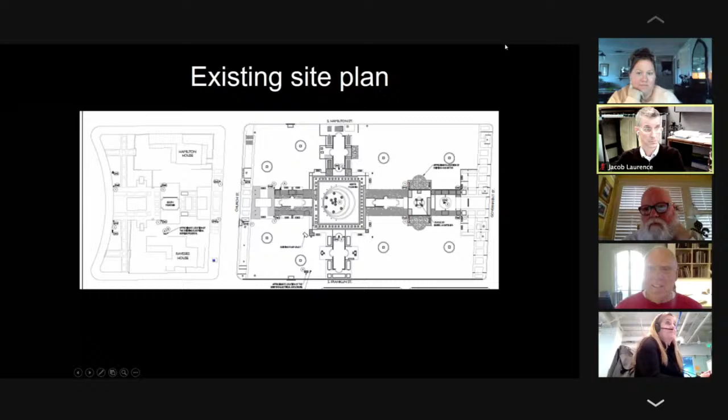So anyway, I just wanted to give my support to this after we talked thoroughly about it, and I understand it now. And it will certainly replicate the lights with the gas lanterns with the mantles in them, which do exist there. And then they want to use all the parts that are salvaged from the other actual flame gas lanterns in the historic districts wherever they can be used. So that's my 2 cents.

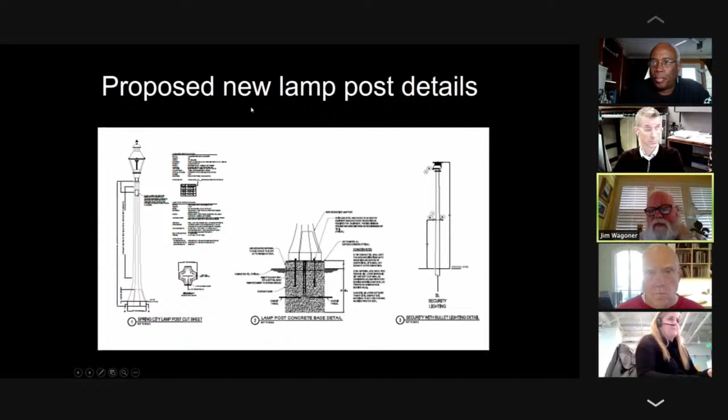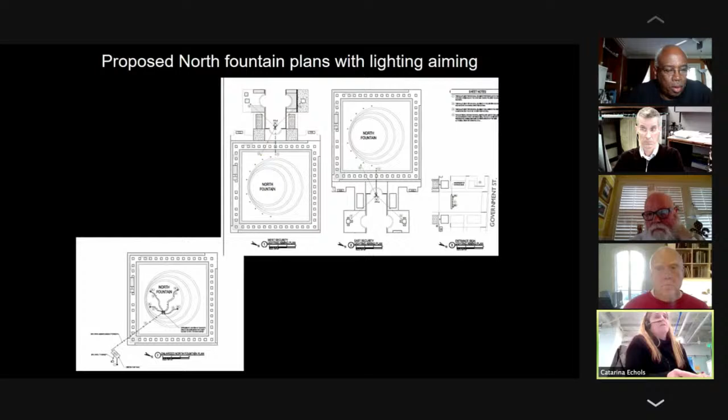Thanks, Craig. I don't know if we've jumped ahead in the process, but I appreciate knowing that. Well, in that case, are we ready to go ahead and do an approval of the application as it was presented originally and further elaborated upon when we met?

Well, I'll make the motion if necessary. Do we need to make a motion now so we can vote? That would be great, thank you. This is Joseph. I make a motion that we accept the proposal for the new gas lanterns in Spanish Plaza as is. Don't we have to go through the regular application procedure? Yes, there needs to be a motion to find facts. Let me do that right now, okay. I make a motion we find facts as written by staff. Second, Steve. All in favor? Aye. Aye. Any objections?

Motion passes. I make a motion that this application does not impair the historic integrity of the neighborhood district and be granted a COA. Have a second?

Second, Steve. All in favor? Aye. Aye. Aye. Aye. Any opposed? The application passes. Thank you.

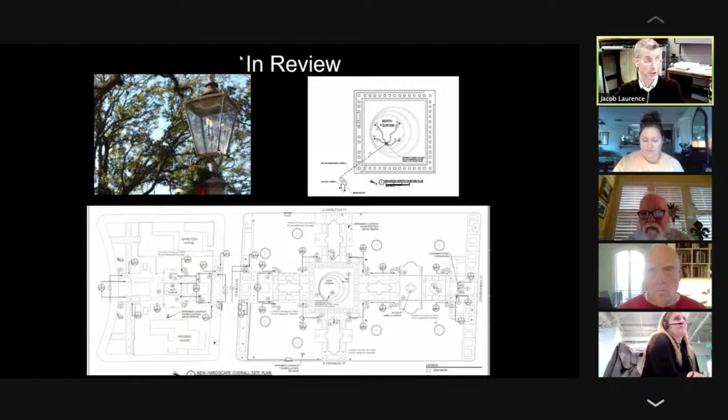Thank you, Jacob and Brad. Thank you all for all of your consideration. We do appreciate it. And I thank you, the city, as well, for all the collaboration that we had and looking forward for more. Great work.

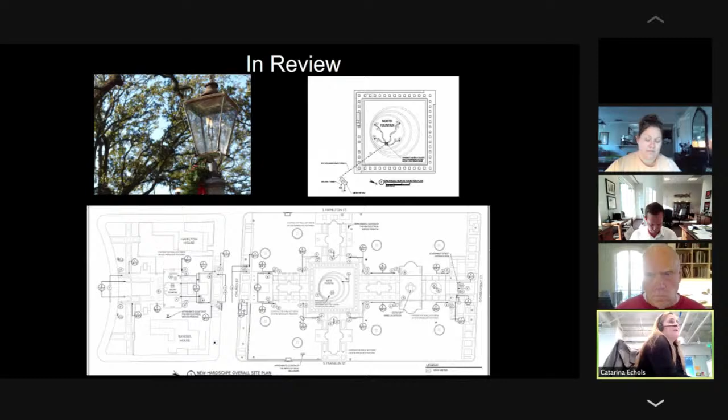All right, Christine, let's move on to the next application. At this point, if any member of the board needs to recuse himself or herself, please do so.

So the next application is 62 Semmes Avenue. The applicant is Kathleen Huffman on behalf of Brett Simmons and Joanne Wilson. Welcome, everybody.

Hi, Christine, do you want... Kathleen, do you want to- I recuse myself from this vote. Thank you, Kathleen. Christine, do you want to present the application?

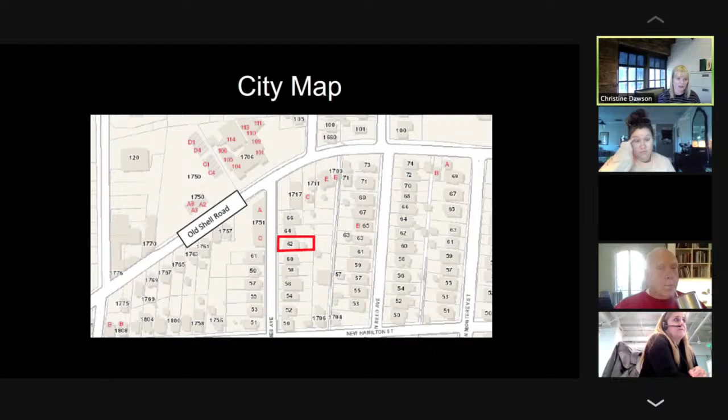Certainly. The subject property, 62 Semmes Avenue, is a contributing property within the Old Dolphin Way Historic District. The application under review involves the construction of a rear addition to accommodate 2 bedrooms and a bathroom. Per the guidelines, additions should be placed to the rear or side of the historic building whenever possible. The proposed addition to the house will be placed to the rear of the existing house.

The guidelines further instruct that additions should be differentiated from the main mass of the original structure by using a physical break or setback from the original historic wall to visually separate the old from the new. The proposed addition would be set back by 2 feet from the north elevation of the house, and it would be separated from the original mass of the house on the south side by the proposed inset porch, differentiating it from the original structure.

The guidelines instruct that additions should be designed to be compatible in massing and scale with the original historic structure, matching the foundation and floor heights in addition to those of the historic building. The foundation height of the proposed addition would match that of the existing house. The massing and scale of the addition would be compatible with the historic house as its approximate 660 square foot footprint would clearly be subordinate to the historic house, which has a footprint of approximately 1,457 square feet, according to the county's tax assessor website.

The guidelines state that the exterior walls of additions should be designed to be compatible in scale and rhythm with the original historic structure. Compatibility means that the height of an addition is proportionate with the historic building, with floor heights on the exterior of the addition designed in a fashion that reflects the floor heights of the original historic building. As noted above, the floor height of the proposed addition would match the floor height of the existing house, and the overall height of the addition would be lower than the original block of the house by 10 inches to 2 feet 3 inches.

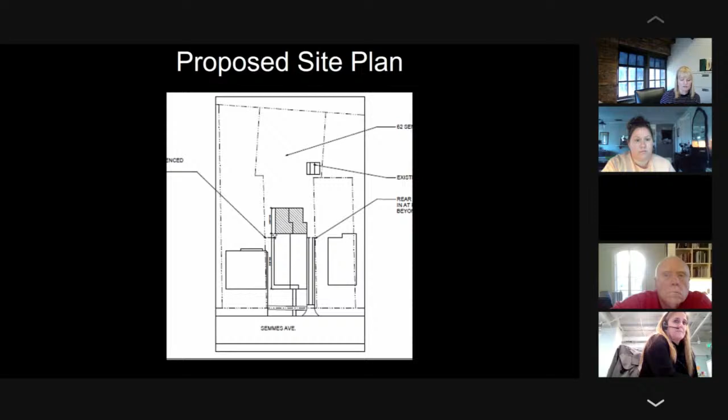The proposed addition would include detailing such as fascia boards and exposed rafter tails that would match those found on the existing house. The windows in additions should be compatible with those of the original historic building, including size, place, and spacing. The windows proposed for the addition are reused from the existing house.

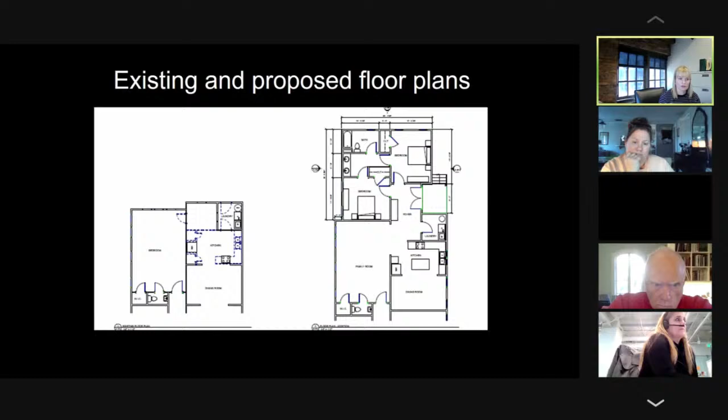The windows would be irregularly spaced, as are the existing historic windows, in accordance with the guidelines. The proposed side porch will be covered by an integral gabled roof in conformance with the guidelines, which instruct that a rear porch be designed so its height and slopes are compatible with the original historic structure, and that new porches be compatible in scale, proportion, and character with the existing historic building.

Foundation heights should match, and materials used for the porch should be appropriate to the historic building. The proposed porch would have a footprint of approximately 64 square feet, about 4% of the footprint of the existing house and approximately 3% of the enlarged house's footprint. It would be simple in character with no complicated ornamentation. Therefore, the proposed porch would be in conformance with the guidelines.

Staff recommendation: based on section B above, staff believes the proposed construction of a rear addition to the house would not impair the architectural or historic character of the subject property or the surrounding district. Staff recommends approval of the application.

Thank you, Christine. Who's representing this application? I believe the owner of the property, Ms. Anderson, is here. No, yes, I'm representing. This is Kathleen. Kathleen, so you're going to be presenting the application to us? Yes. Okay, well, welcome.

Is there anything else you want to add to Christine's narrative? I had spoken with the owner yesterday, and they have requested that we do the lattice panels between the brick piers. We had initially had the lap siding going down to the grade, which I know is unusual, but it was in an effort to match what was existing out there. But they have requested that we go with the lattice panels.

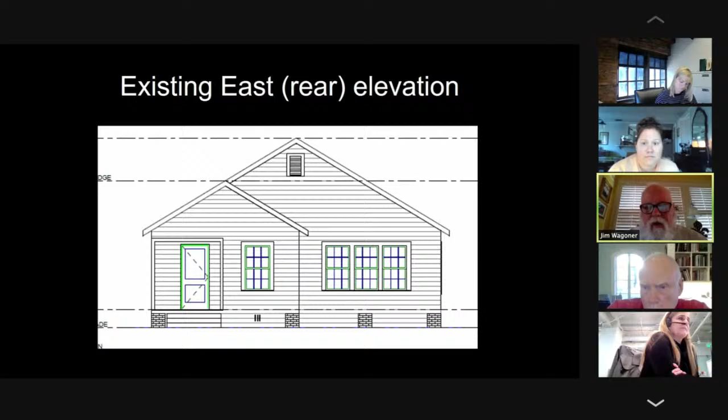No? Kathleen, I would just ask, are you then amending the application to state that you'll add the lattice on the side and rear elevations of the property? Of the addition? Yes. I would say that I'm amending the application to add the lattice below the lap siding around the northeast and south elevation.

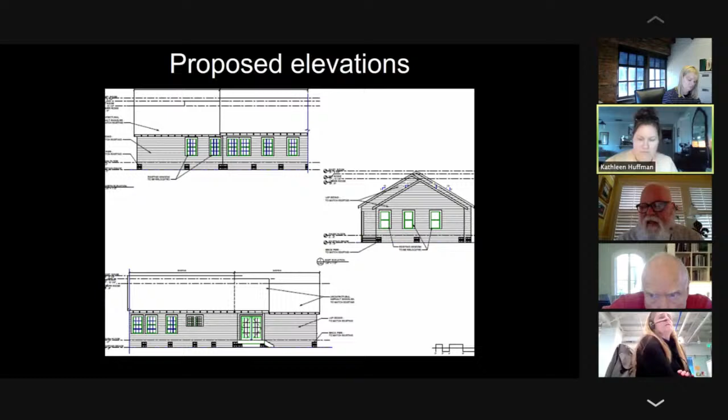Understood, thank you. This is Steve, I'll make a motion to find facts as amended, to add the lattice panels at the addition as mentioned by the applicant. Second, this is Jim, I'll second that motion. Thank you, Jim. All in favor? Aye. Aye. Any objection? The motion passes.

Do I have a motion for approving the COA? I'll make a motion that the project does not impair the historic integrity of the building or district and should be granted a COA as stated. Thank you. Do I have a second? Second. Craig. All in favor? Oh, sorry.

Aye. Aye. Aye. Any objections? Okay, it passes. Congratulations. You ready to go?

When you define the lattice, though, we assume it's a wood lattice, correct? That's correct. All right, thank you.

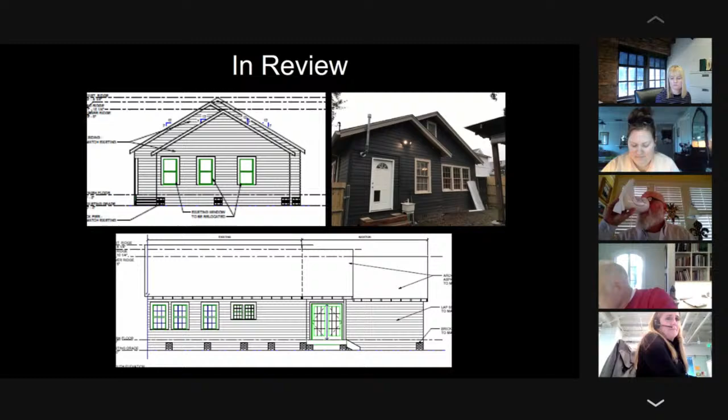So the next application is 908 Augusta Street, and the applicant is Elizabeth Anderson. Christine, will you please read the application?

The subject property, 908 Augusta Street, is located within the Oakleigh Garden Historic District. The application under review involves the demolition of an existing side rear porch and the construction of a 591 square foot addition to accommodate an additional bedroom and bathroom, a new master bath, and a new laundry room, and the construction of a new 208 square foot porch on the rear elevation.

The application proposes to remove the existing rear side gallery porch in order to add indoor living space to the house. The guidelines instruct preserving an original gallery or porch on a house. Although it is not known whether the gallery is original to the house, it appears on the 1904 Sanborn map, which means the gallery is considered historic or over 50 years old.

Given the lower roof line and subordinate stature of the wing to which the gallery is attached, it is likely the gallery was part of the original kitchen wing, or perhaps a separate kitchen building that was later attached to the house, and may not have been original to that wing or the building.

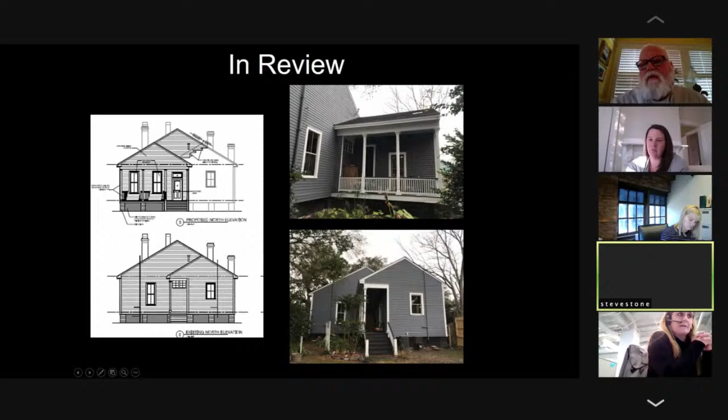Just to help me understand the location of this home, am I correct this is a home that's next to the Joe Kane house? Correct, just to the west of it. Yeah, I think this was Hayes Holmes' house, I guess Ms. Anderson purchased it from.

I'm curious, Steve, not necessarily an objection, but I'm curious about the staff's comments regarding the rear gallery potentially being part of a historic kitchen to this house, and we're going to take it off. I'm just wondering what your thoughts on that are, Steve.

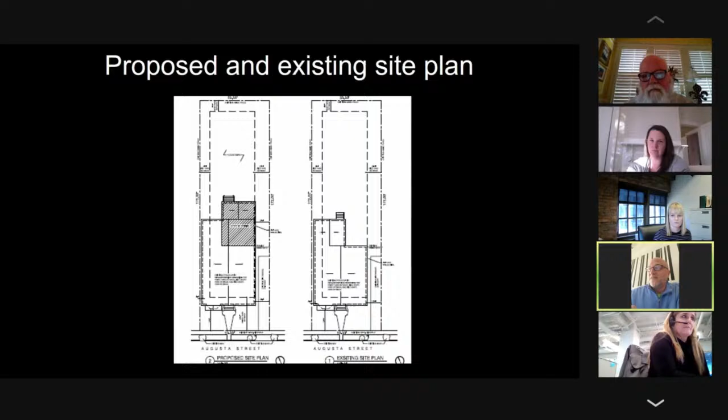Well, without proper documentation, I can't really speak to it, and I think even staff admitted we're not really sure what went on there. What we believe is that where the hall bath is at the end of the porch was the old entrance. So the door, and Liz, chime in if I'm off base, but I think the door to the bathroom from the hall was the old door into the porch. And the hall bath was added at a later date because it still has the porch ceiling on it. That window by the tub is the only one we're going to salvage but not reuse.

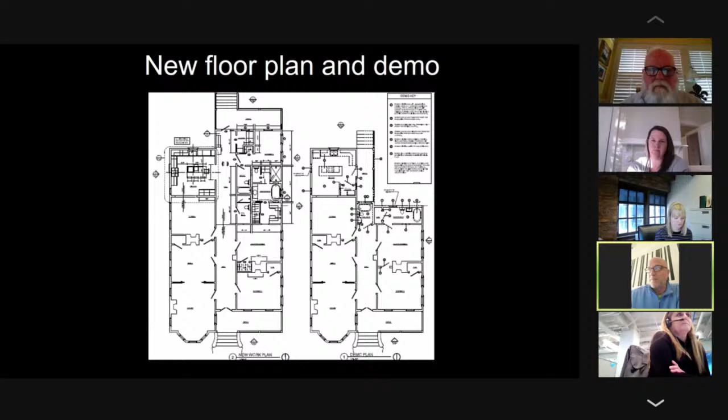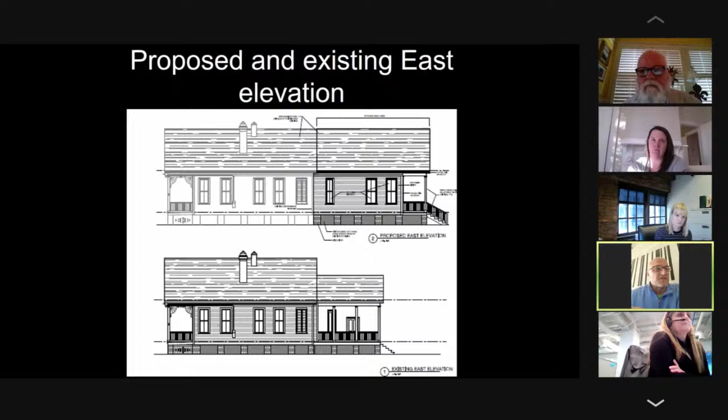It looks like it's a double hung window that people have kind of modified and turned sideways to make a makeshift window in the back there. So that's a long way to say, Jim, we just don't know the true history of that porch, and it's in pretty bad shape. So we tried to keep basically the same size, but oriented to the back instead of the side, which happened to work out with our addition.

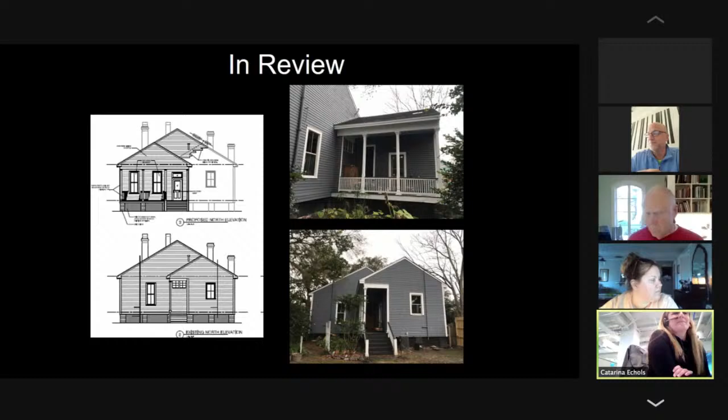Thank you. All right, our final application is for 508-518 Dauphin Street. The applicant is Matt Lamond on behalf of Jacob Peavy. Welcome. Christine, do you mind reading the staff report?

Certainly. The subject property, 508 to 518 Dauphin Street, is located within the Lower Dauphin Street Commercial Historic District. The application under review involves the removal of facade elements, installation of new storefronts, repair of existing stucco, the installation of new awnings, the infilling of two openings on the west elevation and one on the north elevation, and the creation of a doorway on the north elevation.

Because no early photographs of the subject facade could be located, it is unknown what changes may have occurred prior to 1994. However, based on file survey photos, the facade of the eastern of the two subject properties appears very similar to its appearance at that time. However, the westernmost building appears to have experienced changes to both the storefront opening sizes and materials. Therefore, the buildings are most consistent with building condition 2 noted above.

The guidelines state: preserve character-defining features of the historic commercial facade and preserve the character of the cornice line. Furthermore, the guidelines state that historic doors and doorways should be preserved in their original locations and configurations, and maintain the original doorway to emphasize the commercial entrance. The proposed changes to the building facade would preserve both the basic fenestration pattern, if not the light pattern.

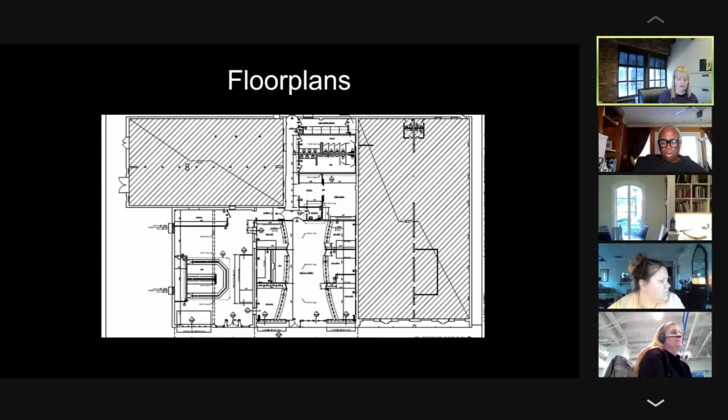The new canopies over the storefront entrances would be of restrained design in keeping with the building's era of construction and composed of materials appropriate to the building. Per the architect, the canopies would closely resemble those found over the entrances to 562 and 564 Dauphin Street, properties of a similar age in the Lower Dauphin Street commercial district. These similar canopies were approved by the ARB in 2016. The proposed canopies would not obstruct any key features of the facade and appear to be in conformance with the guidelines.

The openings proposed to be properly infilled on the west elevation formerly opened into a building that is no longer extant. The guidelines do not specifically address the infill of passages between buildings or openings created when an adjacent building is removed.

Similarly, the guidelines do not specifically address changes to fenestration on rear elevations of commercial buildings, as is proposed for the north elevation of the subject property. It should be kept in mind, however, that the secondary elevations of commercial buildings are working elevations intended for deliveries, trash removal, and other tasks not intended for public consumption. Therefore, changes to these elevations, when they become necessary for the efficient conduct of business, do not merit the same level of scrutiny as changes to the primary facades.

Staff recommendation: Based on section B above, staff believes the proposed replacement of the existing storefronts with wood windows and doors would not be in conformance with the design review guidelines for Mobile's historic districts, and would impair the architectural and historic character of the subject property and the surrounding district.

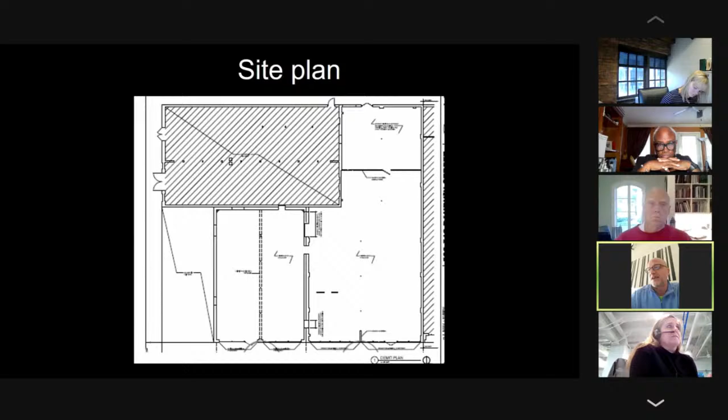As far as breaking up the rhythm into smaller panels, there's a couple of things to weigh. The old storefront was probably very large panels of single pane glass with very small aluminum extruded corners, and obviously we can't come close to building anything like that with codes today. Taking that into consideration, along with the operable panels the client would want, we're not going to have one large panel of glass because it would be massively heavy. So breaking it up into what we thought was a pleasant proportion seemed to be the solution.

Other than going to full glass doors, I don't know how else we get more glass. The only thing I'd add is that I understand the visual presence of the current doors, and keeping that visual consistency with the block.

I have four businesses in the next block, and most of them have mostly full glass doors, but the bottom has some wood trim to it. Some have wood with side lights that mimic that, and in operation it really helps. When we get delivery drivers, they aren't always so thoughtful about using their dollies to open and close the doors, and that's a concern of mine about the overall financial cost of maintaining it. We paint our front doors once a year just because of that, even with a kick plate on the bottom of those doors.

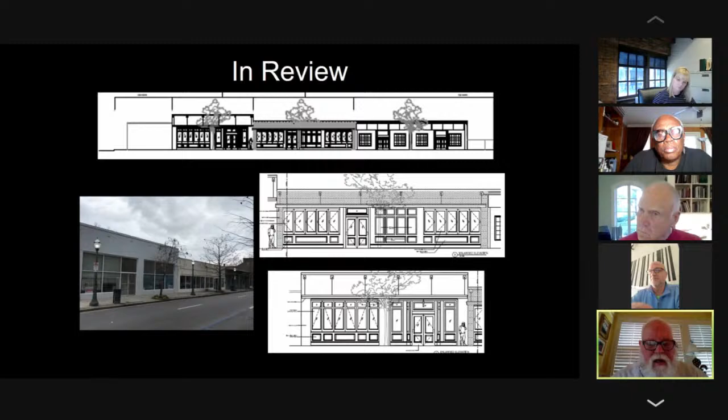And Craig and others who were on the board back when we were looking at it, if I recall correctly, when we were looking at renovations for the structures associated with Moe's Barbecue, I think we approved some wood stuff there as well, which to me falls in the same category. I'm only one vote, but to me, what's being presented actually enhances the streetscape of this area. I appreciate historic integrity, but I think the record is fairly thin on what is the history here. So I'm looking at what enhances as well as the integrity of the structure, and to me, this makes sense.

Well, Jim, I agree with you, but as it says in our application here, staff has written that these buildings were built about 1960. And so if they qualify as contributing, that's one of the things we are supposed to do, require anything done to it to be replicated as much as possible as it was when it was built. Steve just outlined some of the difficulties with that under the current code.

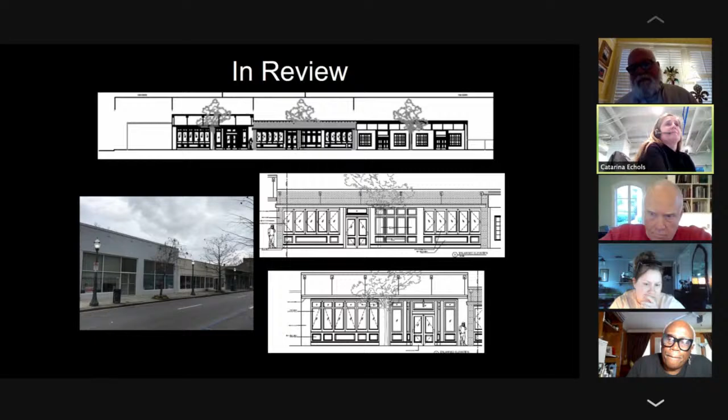Do I have? I'll make it. I make a motion this application does not impair the historic integrity of the building or the district and be granted a COA. This is Jim, I second it. All in favor? Any opposed? Aye. Do I have any opposed? The motion passes. Congratulations. Thank you, everybody. All right, thank you so much. I appreciate it.

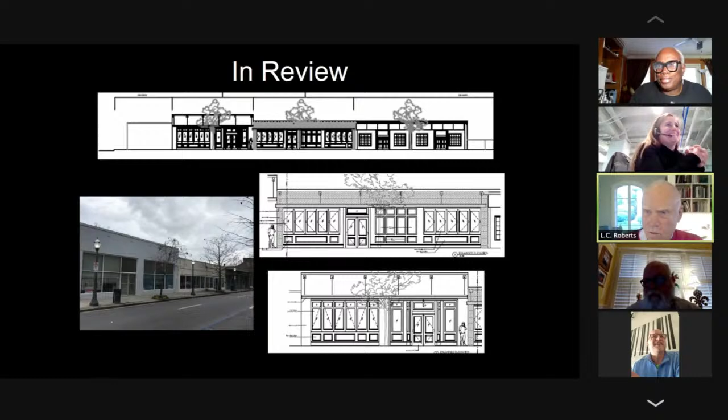Well, thank you, everybody, thank you for bearing with me my first time around. I'll try to do this better next time. Well, you were good, you did a great job. You did an excellent job.